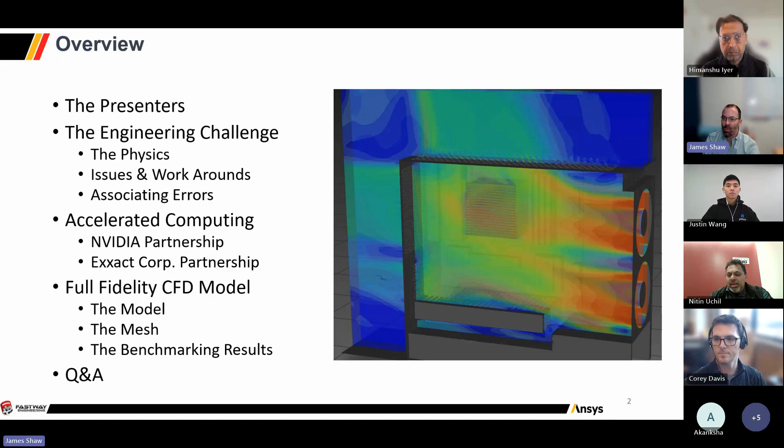So I'm going to start off by talking about who we have on video here, who we have as some of the presenters, and some of the information we're going to share with you over the next half hour or so. And we're going to capture a typical engineering challenge that we see quite a bit. And we're going to be talking about how we're solving that engineering challenge using the accelerated computing technology from NVIDIA and Exxact. And then we're going to show you guys what you probably want to see, which is the results of the benchmarking that we've been working on.

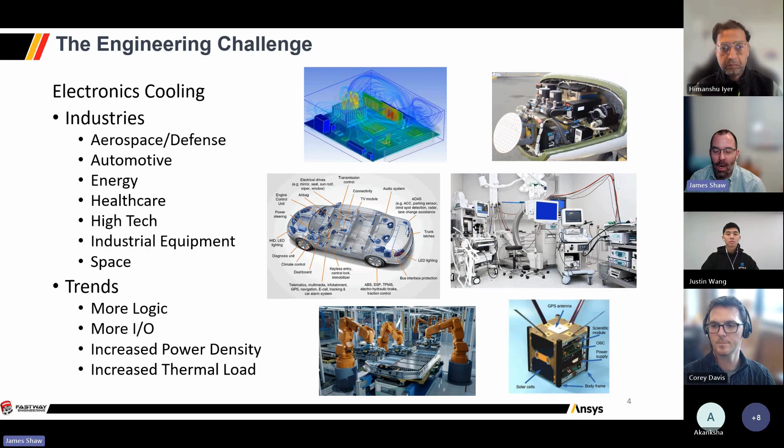And so today, what we're going to be doing is we've benchmarked some of the technology from NVIDIA around how do we make a thermal analysis in Ansys Fluent go faster? How do we get more detail? How do we analyze a thermal load? How do we analyze heat transfer? So the physics that we're solving, for those in the audience who are familiar, is a technology we call computational fluid dynamics, a family of software technologies that have been around for quite some time. And the category of physics, we call it conjugate heat transfer. And that just means that we have a mix of conduction, convection, and radiation. So we're analyzing both solids and fluids.

And one of the challenges that we've always had with electronics is what we call the scale problem, right? We've got ICs, traces, small thin parts down at the microscopic level even, maybe at the millimeter size. Those get assembled onto printed circuit boards that could be measured, say, at the centimeter size. They're put into packages, right, into compartments, into mechanical fixtures and cabinets. And ultimately, which is really popular nowadays, a gigantic data center. And those can even be measured in meters in many cases.

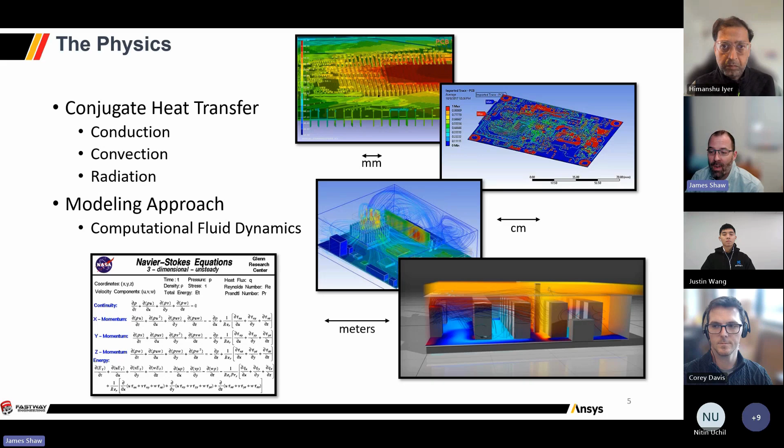And so when we're analyzing heat transfer, we have had to pick that scale. Are we going to pick the millimeter scale, the centimeter scale? And because of computing limitations, we've kind of had to stay inside that scale. Well, what that really means is as we're developing technology to keep our electronics cool, we end up developing some really high aspect ratio geometry. You are probably familiar if you've been a designer or a fan, if you will, of the electronics technologies, whether consumer or industrial. But we've got a host of different ways of trying to keep our internal circuits cool: finned and pinned heat sinks, grates, plates, louvers, filters, heat pipes, of course, in some of our laptops.

And so as a design engineer, as a modeling engineer, I'm in CAD, I'm in CFD, and trying to create a full fidelity physics model is usually hampered by my computational power. I've got huge patterns of really, really thin parts. That's going to push my CAD program. I've got my mesh count, if you're familiar, right, in CFD, that goes up into the millions, if not tens or hundreds of millions.

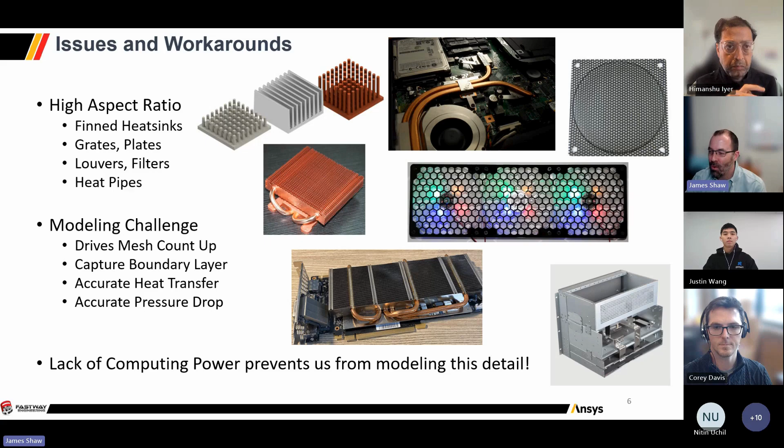And so we've had all these methods trying to capture the actual physics, trying to capture heat transfer, trying to capture some of the fluid characteristics like the boundary layer, and trying to capture accurate pressure drop, right? We're trying to put fans in, we're trying to keep things cool. And so we've got a whole host of simplifications, right? A necessary error, if you will, that we've had to build into our CFD models. And I'll give you an example of that.

Those who have modeled before are probably familiar with what we call the porous media assumption, or Darcy's law. Well, that basically means that we don't have enough computational power to do this filter or this grate or this fin heatsink. And so we model it in CAD as a block, as a simple rectangle. We mesh it very coarsely. But to do that, we have to enter in information that we don't know. What is the pressure drop? What are their inertial losses? We actually make this fancy calculator that makes CFD even more complicated.

And so for years, we've had to basically introduce more error into our CFD models. We've had to increase the level of effort for pre-processing. We've had to do more testing. The whole point of simulation is to try to reduce the testing load. And we use assumptions like Darcy's law for porous media. We end up having to make a simplified wind tunnel to try to capture pressure losses and viscosity losses and heat transfer coefficients for this filter or this porous media.

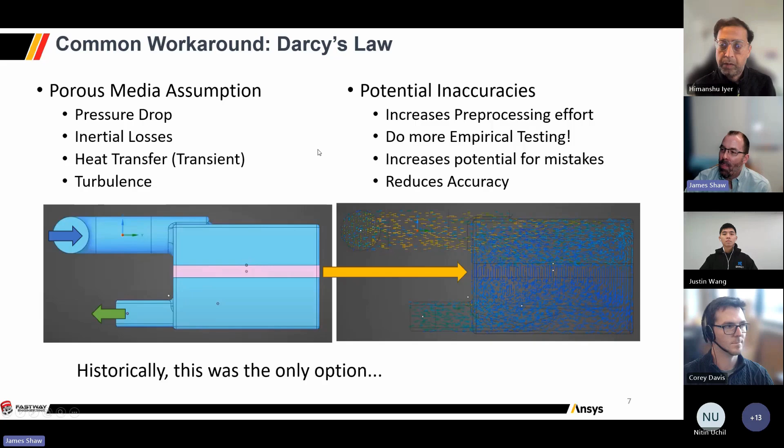And so in a way, our efforts for increasing accuracy of modeling and increasing our insight for engineering have been hampered by the hardware limitations that we've had. And so that was then. Of course, we're here today to talk about solutions. And so I'm going to hand it over to Himanshu from NVIDIA to talk about ways that by increasing the ceiling of your computational power, we're able to get more insight faster.

Yep. Thank you. Thanks for that background, Jim. So as I mentioned, my name is Himanshu Iyer, and today I want to give you a brief overview of how NVIDIA and Ansys have been working together for many years now in providing these solutions for designers and engineers to be able to perform fidelity simulations, to be able to perform these simulations faster in order to create optimal products, better products that you are working on. So let's go to the next slide, Jim.

So from the way we see it, accelerated computing, essentially computing with GPUs on the NVIDIA platform, is at a tipping point today. CPU compute has not been scaling over the last few years. It has kind of tapered off. And even currently, there are hundreds of billions of CPU hours that are spent running these large-scale simulations.

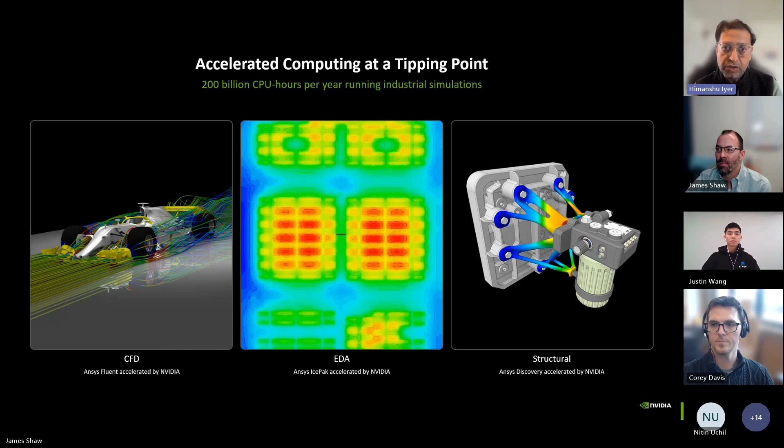So that is where we see accelerated computing with GPUs playing a key role in enabling designers and engineers to be able to do these higher fidelity simulations faster. So if you go to the next slide, Jim, yeah. So I mentioned how the GPU compute is scaling. If you see this chart, it has been growing. It has been scaling almost linearly year over year over the past few years. Why are GPUs the game changer when it comes to simulations? It's because of the nature of its architecture, right?

GPUs can have hundreds or thousands of cores that are doing these calculations. Many of these calculations, especially when it comes to CFD and electromagnetics and such, they are a lot more efficient as they can do thousands of these calculations, millions of these calculations in parallel. And another factor is the memory bandwidth. The memory bandwidth is doubling, tripling for these GPUs with every new architecture that we are coming out with, and that enables these simulations to be done much faster, as we will see in some of the benchmark slides later.

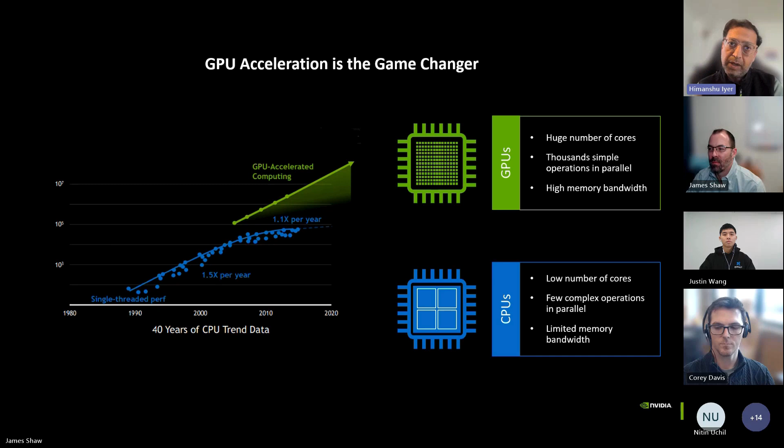As compared to CPUs, right? CPUs have a fewer number of cores. The calculations are not done in parallel essentially, and the bandwidth can be a bit of a limitation. CPUs are still required, right? CPUs are working in conjunction with the GPUs. But in many of these simulations, in many of these solvers, the compute is essentially offloaded to the GPU, while the CPU is doing other operations to make sure that all of these GPUs are getting all of the data for doing these calculations, and that's how overall we are speeding up these simulations.

If we go to the next slide, Jim. So the way we see this developing is, if you go back, let's say 15 years or so, majority of these simulations were all CPU based, all simulation applications, ANSYS, even other ISVs had CPU based solvers. But we have been working with these ISVs over the last 2 decades or so, helping their developers port these solvers to the GPUs, and the result is that we are in the transition phase from CPU compute to GPU compute, computing on these accelerated platforms.

And what this enables designers, engineers, simulation specialists to do is to run larger models, right? You can add more detail, as Jim mentioned earlier, while getting the results much faster. The accuracy is the same. There have been many benchmarks. Even Ansys Fluent has a benchmark comparing CPU GPU results, and the results are identical. So you can run larger simulations, you can run them much faster, and you can perform more optimization studies to be able to make sure that you're delivering the best product that you can.

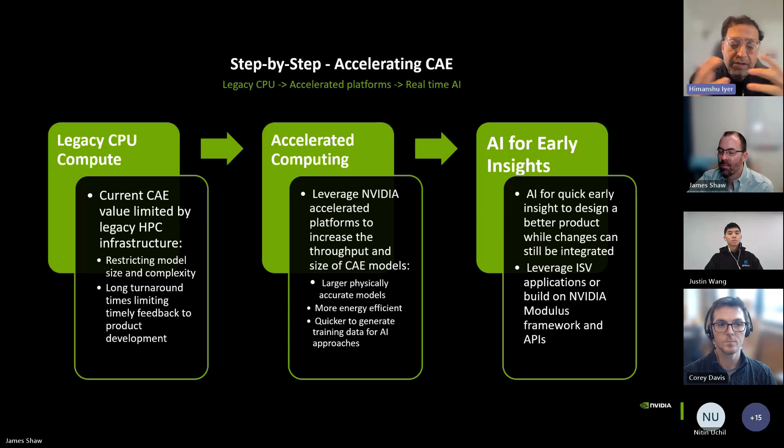So I think we are at the cusp of that, going from accelerated computing to incorporation of AI in these simulation workflows. And again, this is something that we work very closely with ANSYS in making sure that the ANSYS development team has the latest libraries and toolkits that NVIDIA develops to be able to accelerate these simulations. Let's go to the next step.

So as I mentioned earlier, right, we have been working with the ANSYS team for almost 2 decades now, and it's not just the GPUs that are accelerating these simulations. It's a lot of these libraries and toolkits that ANSYS has incorporated in their various solvers. So for example, CUDA. CUDA is what enables these GPU solvers. So the Fluent GPU solver is based on the CUDA platform that NVIDIA develops. And that is really what makes these simulations much, much faster while running on GPUs.

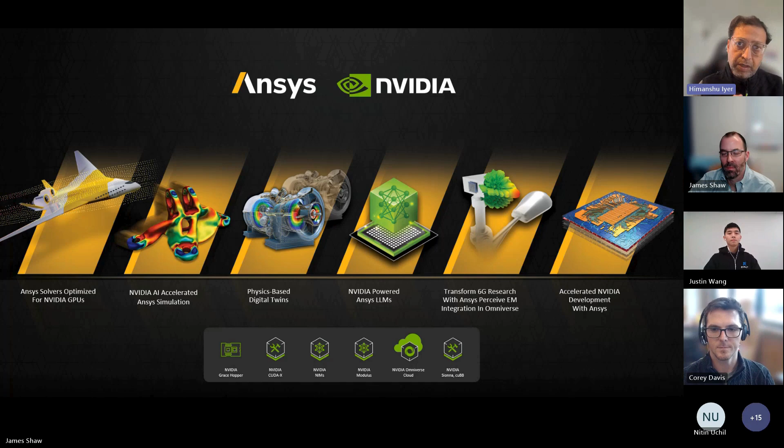It's not just Fluent. ANSYS has a very broad portfolio of products, right? ANSYS has optical simulation applications such as SPEOS and other applications that also have GPU solvers. ANSYS Discovery has GPU solvers. HFSS and Lumerical on the electromagnetic side, they have GPU solvers. So you'll see more and more coming from ANSYS in the next few releases from their products.

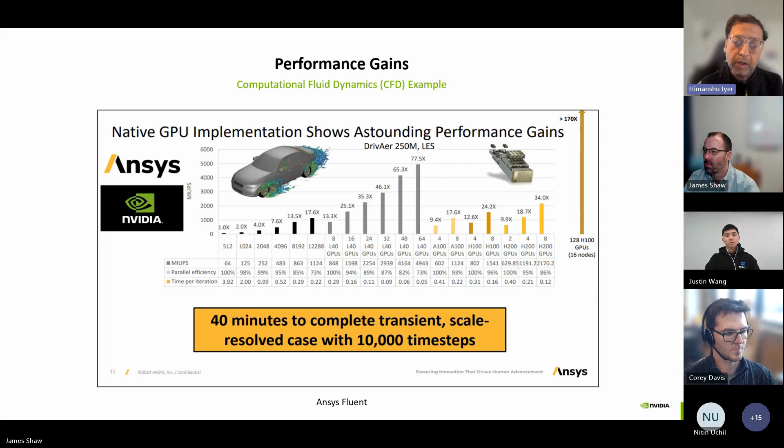The numbers there are again quite impressive. And really the choice of which GPU to use for your applications, for your simulations, it really depends on the form factor. As we will see later on, you can do a lot of these simulations on workstation GPUs like the 6000 series or the 5000 series. And if your simulations are really large, like external fluid dynamics, then data center GPUs like the L40 or the H100 might be a better fit. But it really depends on your application, your model size, and such.

Let's go to the next slide. Just a couple of customers who are now running all of their simulations, ANSYS Fluent simulations, on NVIDIA GPUs. Leonardo Helicopters, when they are doing external aerodynamics for their helicopters, they are now running these simulations on NVIDIA GPUs.

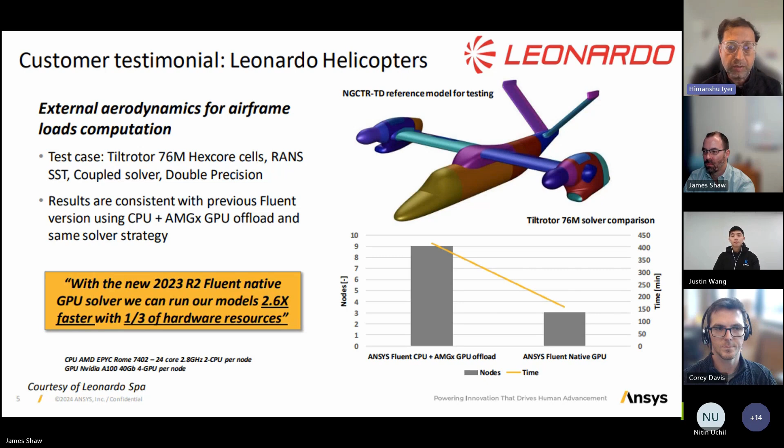The ANSYS Fluent solver for a long time has been a hybrid solver. It was a CPU-GPU solver. Some of the calculations were offloaded to the GPU and some were done by the CPU. But once they transitioned from that hybrid solver to the GPU native solver, they were able to cut down the overall time, and they were able to run many more simulations on their data sets.

Next slide. Seagate, very well known in terms of memory and storage and other components that go in data centers and computers, has been able to see a 50x improvement in their simulations of hard drives and storage drives. Essentially, they're able to evaluate more designs over a shorter period of time, helping them come up with more optimum designs. So these are just two of the examples, but there are many, many customers who are now

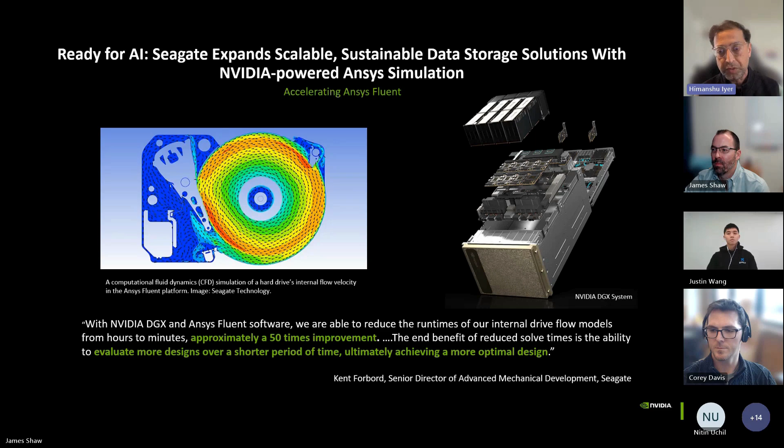running their Fluent and other ANSYS simulations entirely on GPUs. Next slide. I think this is my last slide, Jim. So again, thank you all for joining today, and I am going to hand it over to Justin to talk about some of the ways you can access these GPUs for running your simulations. Thank you.

So we partnered with Fastway and NVIDIA, and our partner with ANSYS as well, to combine our expertise in delivering advanced computing hardware with specialized expertise in simulation, so that we can deliver you an optimized solution to reduce your simulation time and meet the complex demands of engineering and simulating whatever you need to simulate across multiple industries, whether that's electronics, computational fluid dynamics, fans or cars, whatever you're simulating. We want to provide a unique hardware experience for your specific workload.

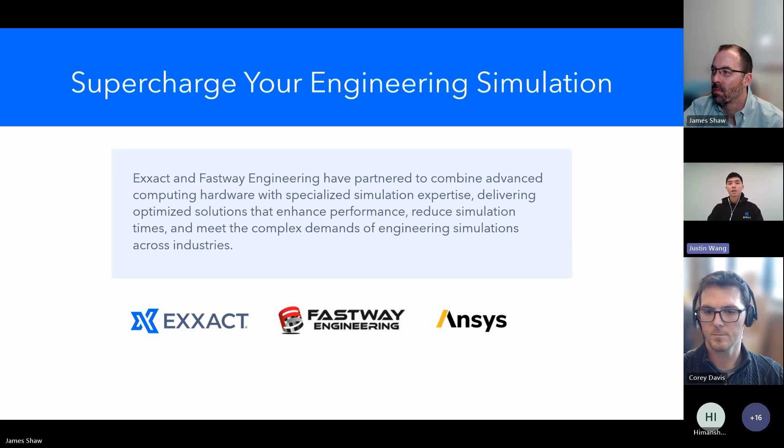Go to the next slide. So I want to reiterate why you should choose GPU over CPU, specifically for something like Fluent or photonics type research and simulation. Himanshu touched upon this: CPUs handle tasks sequentially, one after the other, resulting in really long simulation times. They can take days, sometimes even weeks if your model is really complex.

Whereas GPUs, on the other hand, utilize a parallel processing technique where multiple calculations are run at the same time. Think of it like pixels on a screen for video games. When you're simulating or rendering those graphics, they happen all at the same time so you get a very pleasing visual image, especially in those really big AAA titles with numerous polygons. In the same way, in a CFD simulation, you get all those elements and particles being simulated and calculated at the same time, which results in an increase in complexity.

Go back to the last slide, Jim. So the complexity means that you can increase the model size of your simulation, which allows you to retain your complexity and retain the information you want to simulate, and draw better conclusions before you start your prototyping process. And lastly is budget.

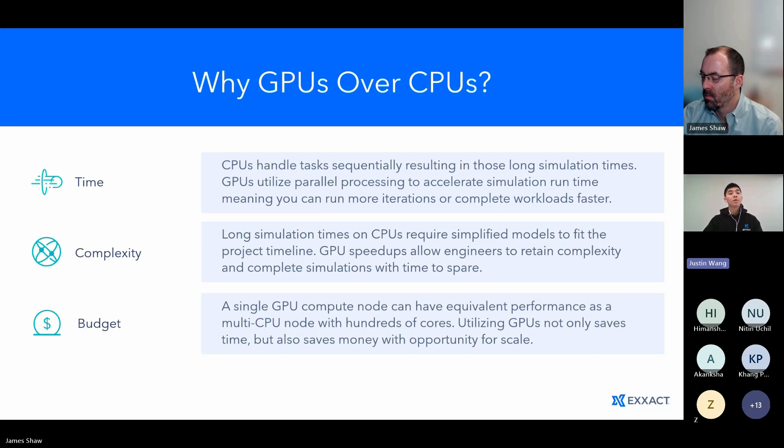So we want to highlight our expertise in delivering solutions for you guys. Exxact is a 30-year company that's been delivering high-performance computing solutions for a really long time now. And we help you evaluate, build, integrate, and optimize workstations, servers, or clusters from start to finish. We have numerous partnerships with multiple hardware partners, and we were actually named NVIDIA's 2024 Solutions Integration Partner of the Year. We were recognized for our expertise in architecting and installing

systems that tackle AI, manufacturing, simulation, life science research, as well as other industries. We understand that every workload is unique, whether you're doing multiple softwares, solving on Fluent one day and mechanical or Dyna another day. So we want to make sure our solutions are flexible to your every need, whether you need more GPUs or more CPUs, we're here to help. Our end-to-end services are all built to order, stress tested and validated to make sure you can have a day one operational system.

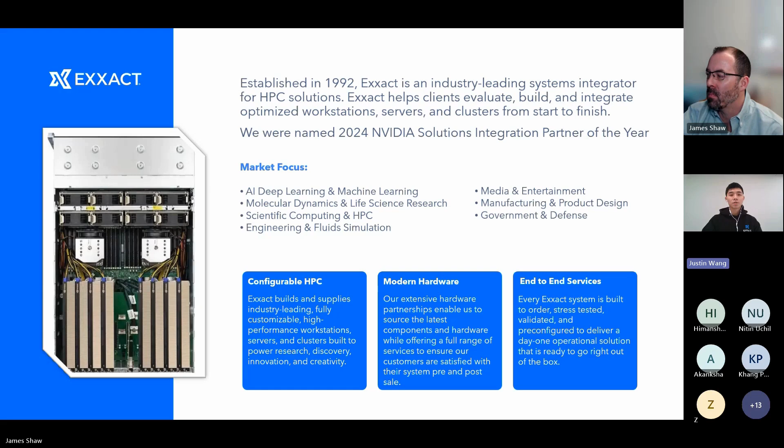So we have a couple of solutions here I wanted to highlight. You can always start off with an individual workstation on the left-hand side, which could be a normal Core i9 with multiple high-performance GPUs, and that would be more centered towards the CFD side, where you're only doing more GPU-heavy things. Or you can go with a dual Xeon quad GPU rack-mountable workstation, which could also act as a server in your rack, and this can be outfitted with a more CPU and GPU balanced system.

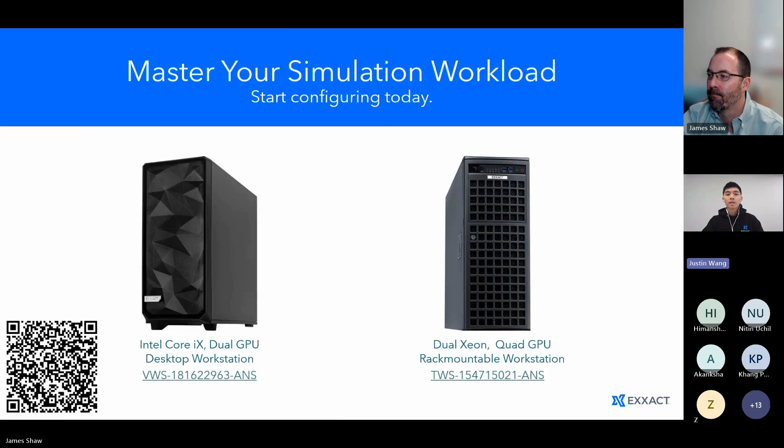Now, if you scan that QR code, you can go ahead and see a bunch of our other systems that you can configure, which include servers, 2U servers, 4U servers. And if you're interested, you can also talk to our team about deploying a multi-GPU cluster, and we're capable of setting up and configuring a system for you to run really, really complex simulations to drive your innovation. All right, and that's all from me. You guys can again scan that QR code, and I'll drop a link in the chat for you guys to check out. And yeah, that's all for me. I'll pass it back to Jim.

Awesome, thank you guys so much for that. It's really fascinating to see all the development work that NVIDIA is doing. Just to reiterate, this is explicitly developing software and hardware alongside each other so that Fluent can take advantage of CUDA cores, and for the foreseeable future there is a scalable solution, right? Not everyone invests in hardware every single year, usually it's a couple years at least. So we really appreciate the partnership from Himanshu and Justin so that we can help our customers and colleagues in the industry develop a strategy for growth on the simulation side. So that brings us back to the model.

I want to share with you just a few slides on what Corey has done over the last several months, to sort of flex, for lack of a better word, some of the high aspect ratio fine details. So this model Corey created, as you'll probably recognize, looks a lot like a workstation with a consumer grade or even higher GPU in it. And what we focused on was a really, really high number of small geometry features.

And particularly back to the original point around porous media assumptions and tricks of the trade, if you will, in CFD, we have no tricks here. This is a full fidelity model. So there are over 3,000 openings, inlets, outlets, and passages between the two fans in the front and the outlet grates in the machine, as well as that GPU being boxed in with its own openings in it. And we really wanted to push the cell count up, as well as push the GPU up.

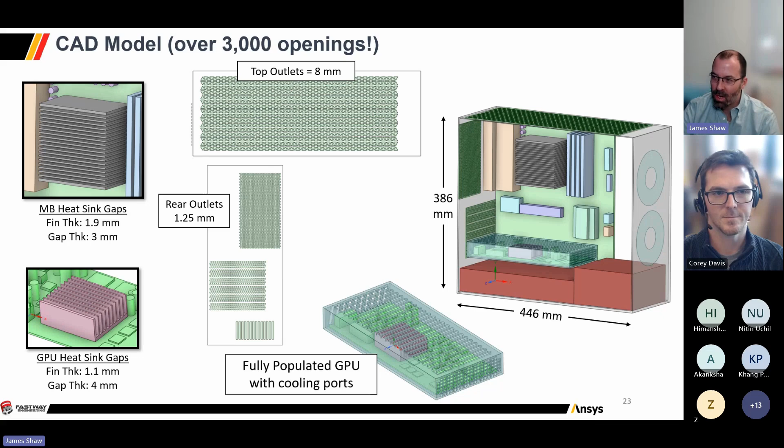But this isn't the largest model in the world, right? You've probably seen some meshes and some CFD benchmarks. In fact, Himanshu had one on earlier that was quite a bit larger than this, the DrivAer external aerodynamic model, which is tested very commonly for GPUs. This is 17 million, okay?

We polled our customers to find out what a typical cell count is for a workstation, or an engineering challenge, and found it's somewhere in the 10 to 20 million cell range. Historically, whatever hardware you had, you're targeting some ceiling, because anything higher than that, maybe you don't have enough RAM or it takes too long.

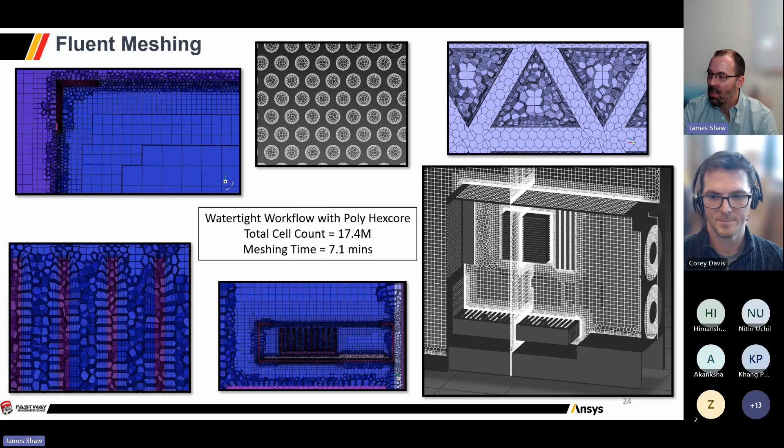That only took about 7 minutes on meshing, not too bad. We were using the latest Fluent watertight workflow, what we call Poly Hexcore. You'll notice we've got beautiful, perfect hexahedrals in the free stream, but as we get up towards the wall, we've got some polyhedra and some inflated layers.

Himanshu mentioned earlier on the accuracy side. Anyone who runs CFD knows that you can run the same exact model twice and it won't give you the same number, but the differences are probably past the decimal, and that is true in this case as well. When we compare the results of a transient CFD on the GPU versus the CPU, you don't have to worry about measurable differences in the predicted temperature. In this case, it is 0.2 degrees Celsius.

So as you start to think about doing benchmarking of your own, you can trust that the results, fluids, velocities, pressures, temperatures, what you're used to on the CPU side, you're going to still get that on the GPU side. Of course, it'll be a little bit quicker. You can see the number is pretty close, and the thermal profile on the boards is almost identical. There's always going to be some nuances because of the fluid flow being very dynamic.

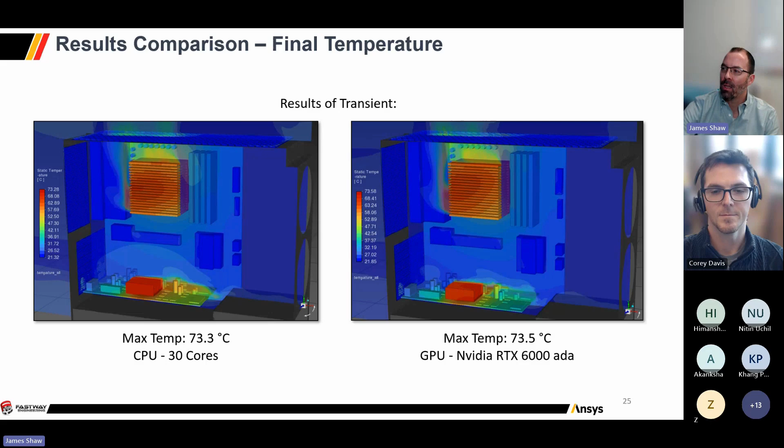So let's move on to the results of the benchmarking. First things first is our standard benchmark. The CPU machine that we have, kind of a daily driver, is a 32 core machine that we use 30 cores of - that's the results of getting the most out of that machine. And so that's got 256 gigs of RAM.

Corey ran some steady states and transients, because we wanted to compare different convergences and iterations on the engineering side, and we try to normalize that. We did test a steady state analysis and a transient analysis across the board. On the overall speed up, that's what we call sort of a 1. But the transient model on that 30 core machine did take about 2 weeks - 16 plus days to get the transient to converge.

That is pretty much a non-starter with respect to, is this a simulation that I can use as an engineer to make some insightful decisions? I don't want to wait 2 weeks for an answer. And that's even at 14 seconds per iteration. But at a transient, sometimes we have the time steps pretty low, and we need to get some high fidelity there. So the first thing we compared that against was the RTX A6000.

Just a single A6000, which, by the way, just slides into the slot that's in the same machine as that benchmark machine. So all we're doing is using the same box. Everything's the same. We're just using the GPU that's in there instead of the CPU cores. The starting point was a 9x speed up. So we're basically at 10x, and all we did was use a single A6000 in that machine.

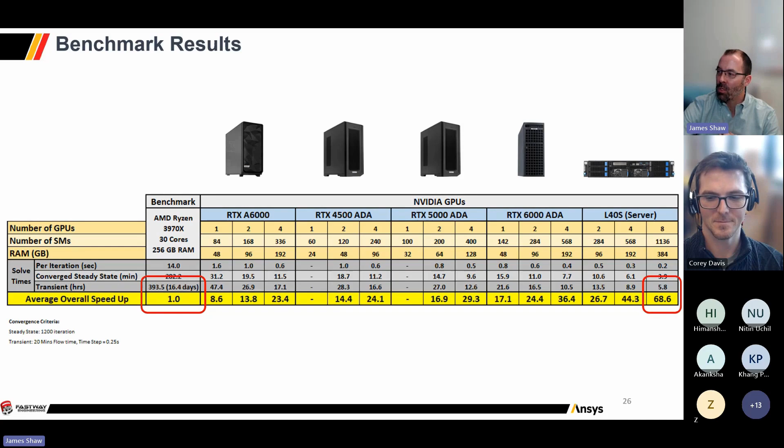To be perfectly candid, last year when we were preparing for this benchmark, we'd seen the white papers, we'd seen the PDFs, and we're like, yeah, we'll see how that goes. Those are all 100 million cell models. We want to see how it works on something a little more realistic for what we work on and for what our customers work on. But we're still seeing 10, 20, 30, 40, 50x speed up. So pretty incredible stuff. With that, I'm gonna pause for a second and open up to Q&A.

If anyone has any questions, feel free to. I think you can unmute yourself on the mic and ask a question. We've got Himanshu and Justin here, as well as myself and Corey, so feel free to fire away, or you can type it in the chat as well. No questions at all.